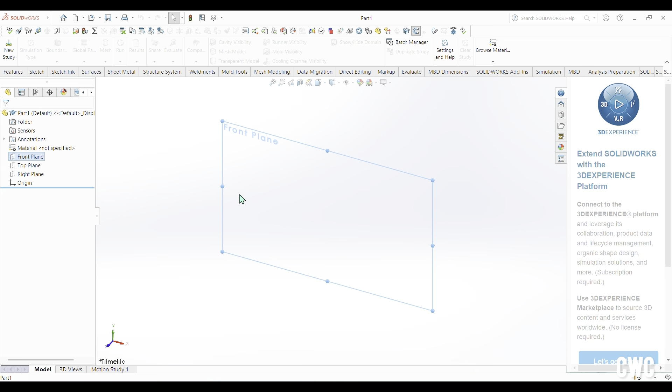When you're in, I'm going to go to the front plane, click Sketch, and click Line. Now I'm going to go off my origin, which is right there as you can see it. Go straight down, then Escape. I want to click it, make sure it is vertical, and then green check mark.

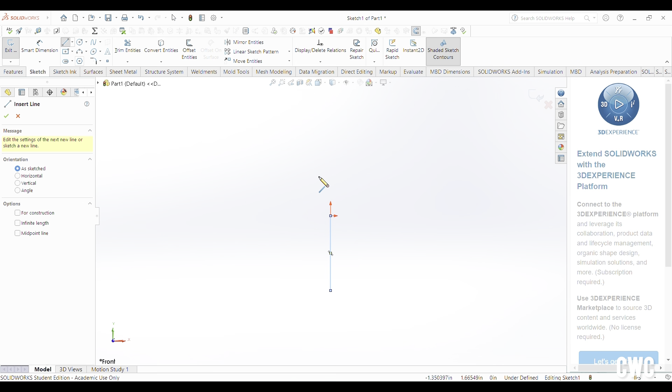Now I'm going to create another line from the origin as well. Go straight across, and then down, over, and don't worry, as I'm doing the sketch, you will see me put a dimension on there. So we are going to make this little square piece, and then just go up slightly, give or take.

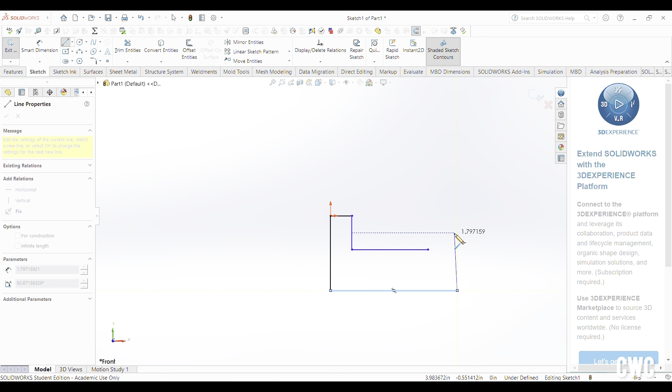Okay, so now as you can see it's crooked, so that's why you press vertical. Green check mark, and then now I'm going to dimension it.

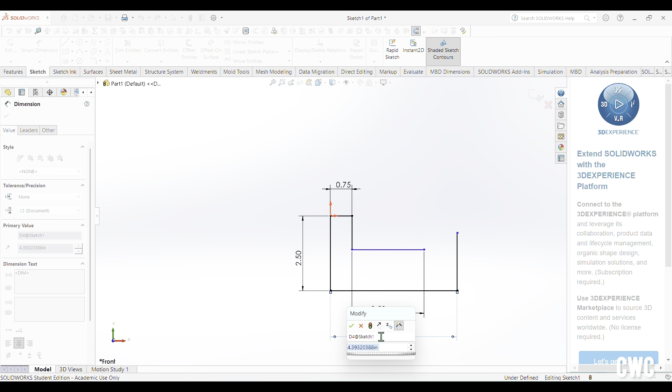2.5 inches, 0.75, and then come down. This would be 2.5, and this one would be, say, about 4.25, and then this one will be 2 inches, and then green check mark.

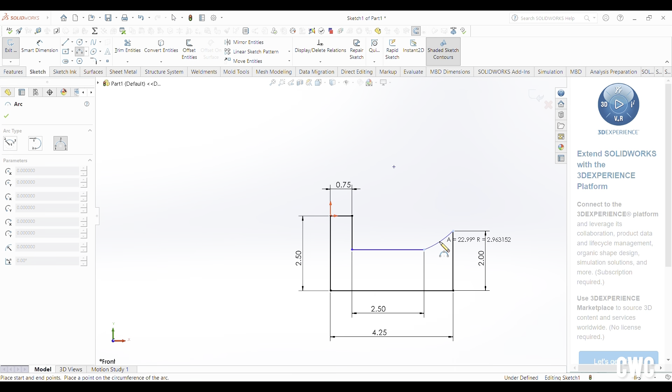Now I'm going to close my box, and I'm going to select the arc, 3-point arc. I'm going to go here, click here, and make it a little dip.

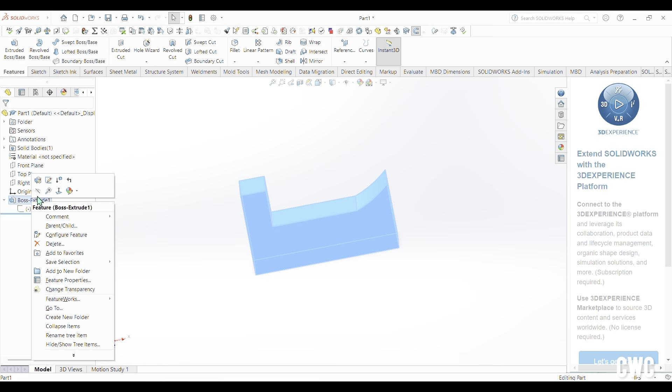Okay, now I'm going to click Features, Extruded Boss/Base, and I'm going to do a point. Actually, I want this slightly bigger. As you can see, it doesn't actually look like what I am going to cut out later, but I'm going to go back in it, not to the sketch but the boss, and I'm going to make this 150, and actually 2 inches. Yeah, so that looks a lot better.

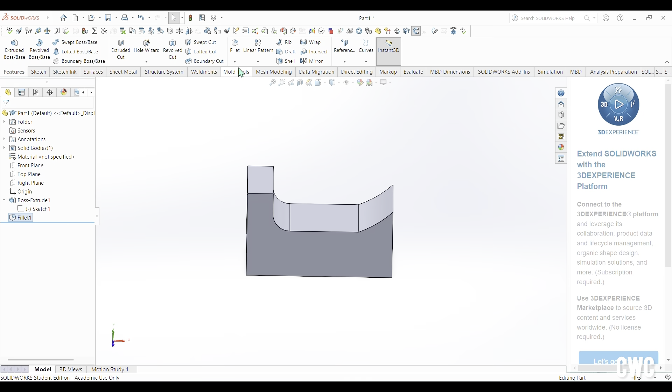It's starting to take shape now. All right, so I am going to fillet this corner, just 0.5, and then now I'm going to fillet this, but actually as you see it, I don't like that, so I'm going to go with a chamfer. Click this, and then it needs to be flat on the top. So what I'm going to do is change up the degrees actually to make it flat, as you can see there.

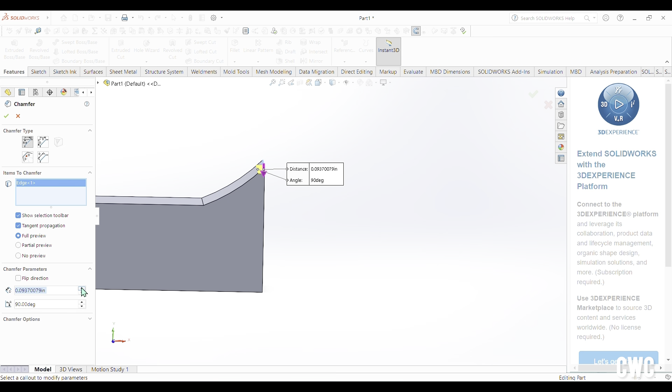And I'm going to make this 90 degrees. And as far as the distance, that's okay. We can leave it right there how it is. So green check mark, there you go.

So now you have your piece, and as you see in the piece, there is also a hole in there in the center. So...

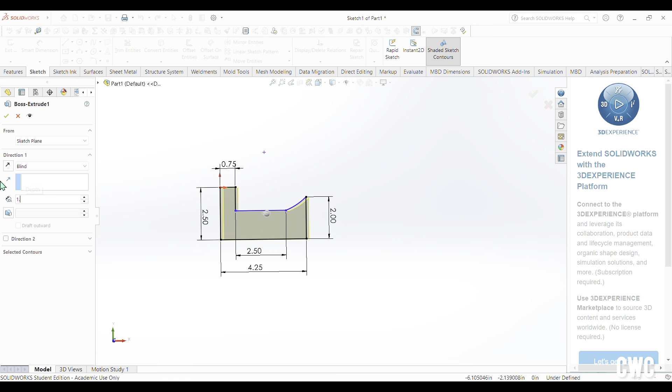I'm actually going to go back in here, readjust some sizes, but it's okay. You'll know what I mean when I say readjust the sizes, because your pieces matter, the sizing. Excuse me, sorry, I lost my train of thought.

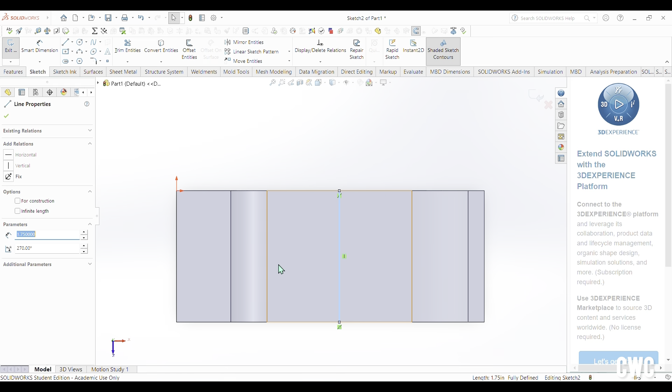All right, so what I'm doing now is I click the inside. This is for the hole, and I'm making a construction line. There you go, make sure these are all construction. If they're not, they'll show as an open-ended piece.

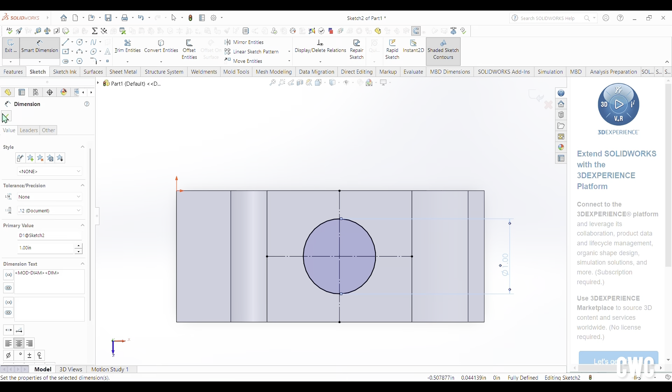And make your circle, this is going to be 1 inch. So there you go, green check mark, features, extruded cut, and we're going to go through all, green check mark, and there you have it, your piece. So nice and simple, easy to draw.

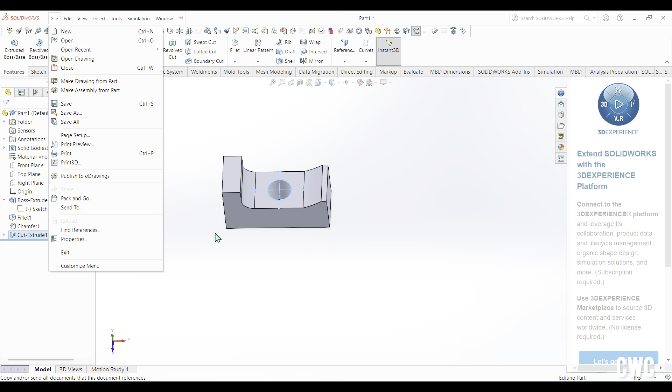These are the pieces that are going to clamp down the MUOS antenna, I believe, if I'm not mistaken.

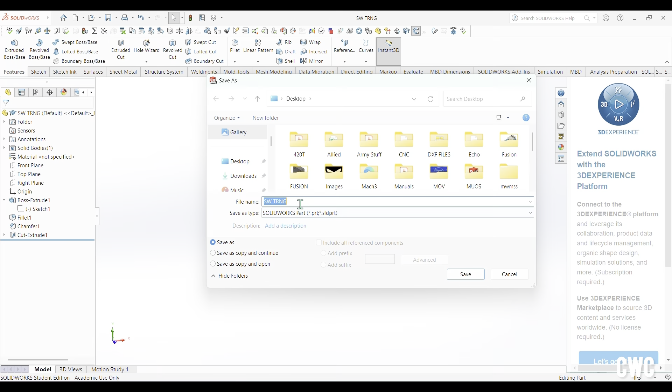But make sure you save your work. I saved this as Solidworks Training, SWTRNG, and I'm putting it on my desktop so I can find it. And then also you want to save it again as a step file, which is right here in the drop down, and put it on the desktop.

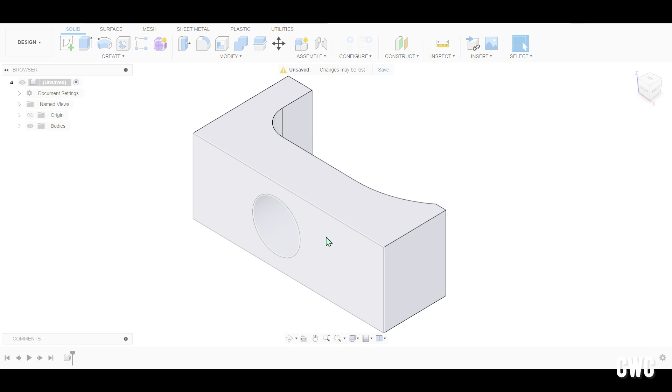This is for Fusion, so that way I can upload in Fusion. Once that's done, go ahead and open up Fusion, and you're gonna go in File, click Open, go open in my computer, and then you're gonna click the SolidWorks Training to Fusion, as you can see here. Populate it right up. This is what I just drew in SolidWorks, as you can see here.

Like I said, I made some minor tweaks, but for the most part, you can understand what I drew and how it translates into Fusion.

All right, so now I'm gonna click top, highlight all, click move, and then I'm gonna make copies of this. So create copy, and then once you click that, I'm just gonna move it up slightly with this arrow.

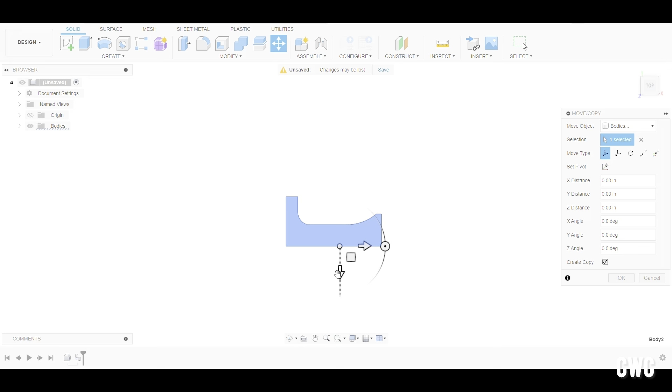Okay, I'm gonna do negative 2 point, I like 2.50 actually. That's a better bet. Don't want them too close because I gotta cut them out. And then once it looks good...

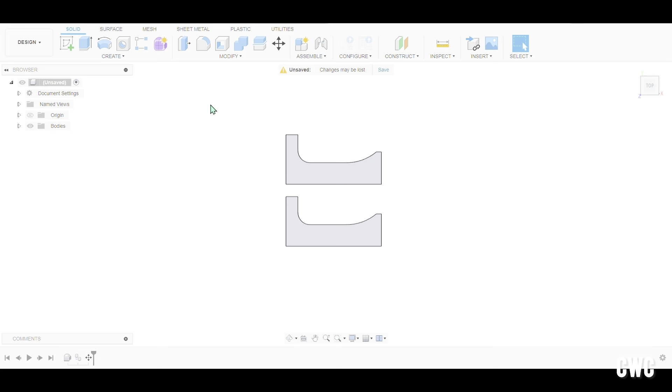Click OK, and then I'm gonna highlight all of them now. Right click, move copy, create copy, and then it should give me 2 more. And I'm literally just moving them directly on top of those other 2 because we're gonna be cutting out 4.

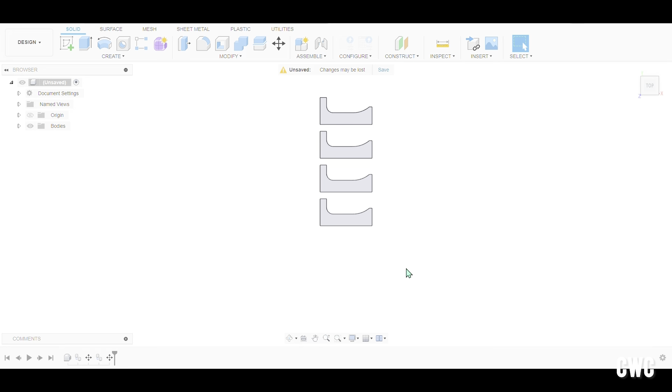Everything looks good, click OK, and then now you're still in the design phase, and to CAM this you are going to have to click where design is, drop down, manufacture, and now this is for the CAM portion.

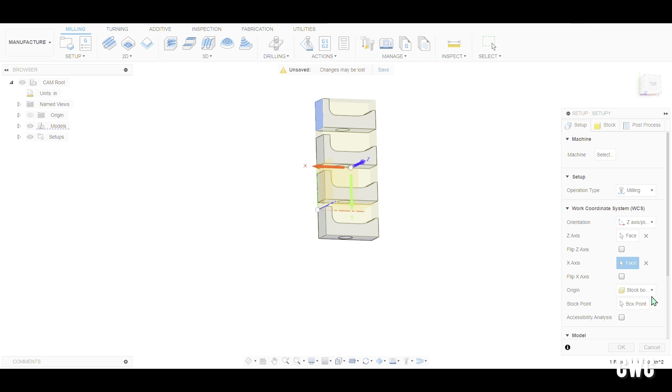You can click new setup, and you are going to click on the orientation Z, and then I click the face, and then for the X I click the side. And then stock box point, this is where you are going to set up your work coordinate system, WCS.

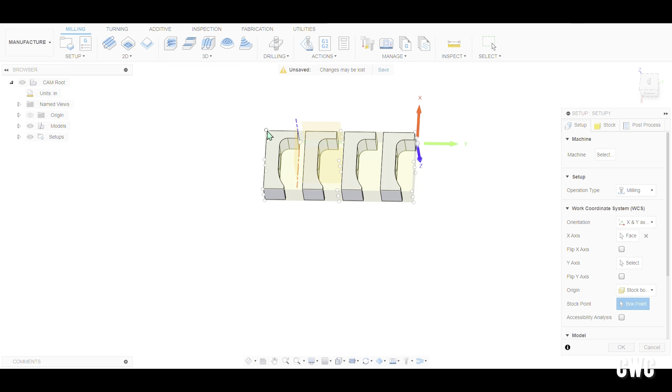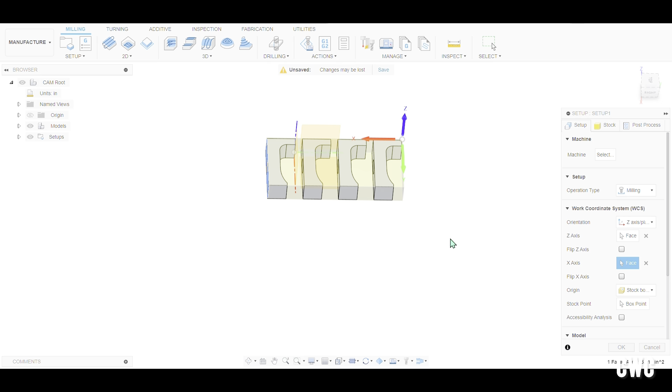I'm going to click this corner because I like the top left. I'm messing around with it, just trying to make it right. So as you see here, click the face of the X back here, then box point, click that corner. Now I'm good to go, and flip X-axis. You have your G54 in your top left. That's how I like it.

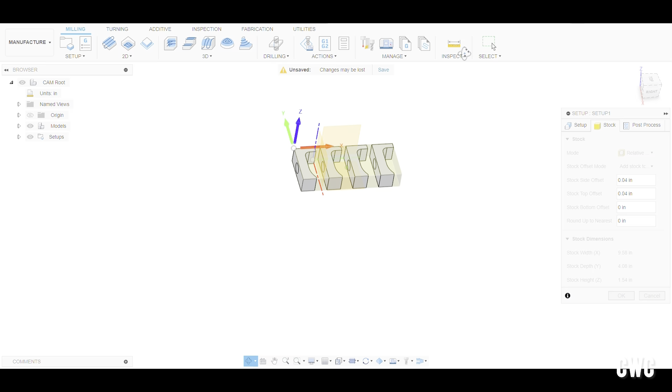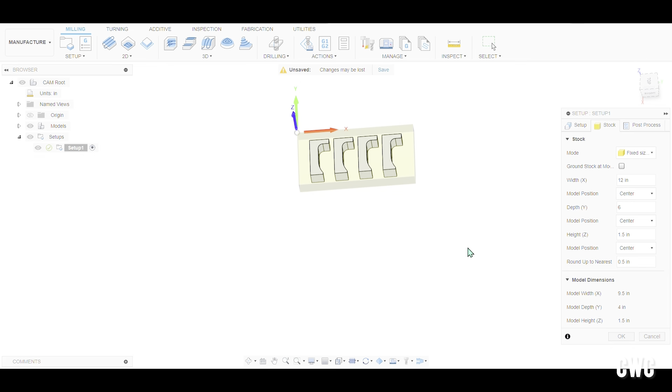Now I'm going to set up my stock so that it matches what I'm putting into the machine. I'm going to go to fixed size box, and on the X I'm going to go with 12. Back to stock, 12, and then the Y I'm going to make it, let's see, I guess 6 doesn't look too bad.

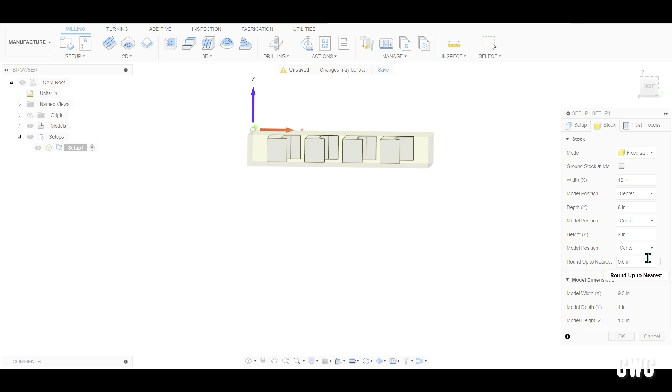Now for the position of the model, back in stock. So the model position is literally top of the Z, and I have it, the offset is 0. So your part is sitting right on the top, like it cuts from the top of the metal.

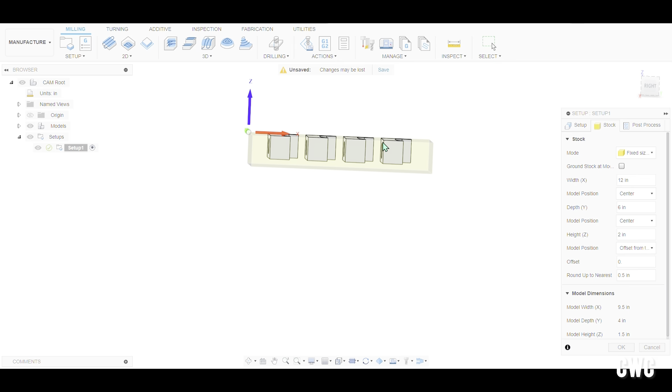And I'm going to change the, as I'm showing you, the height is the thickness of your part. So the thickness of my part is 2 inches, or my stock, excuse me. And then your X is your width and the Y is your length.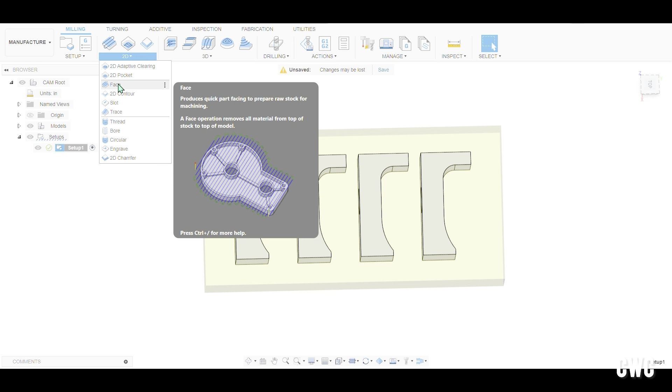And here are the different types of strategies that I plan on using for milling. So there's 2D adaptive clearing, 2D pocket, face, 2D contour, slot, trace, thread, bore, and etc. We're going to go with a 2D contour. Why? Because I've used this before. But before you can actually go with that, you're going to have to create a tool if you don't have a tool library.

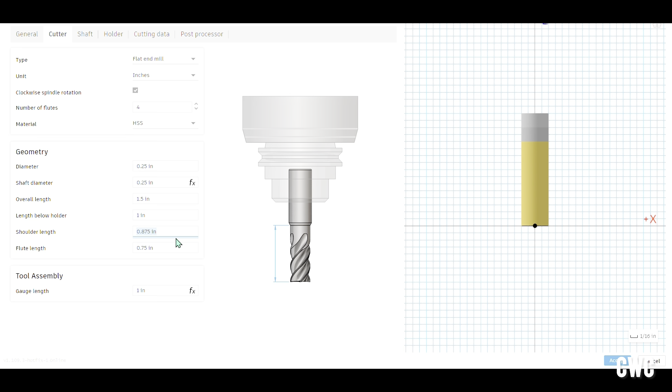So in the plus sign, I'm going to be using a 1/4 inch end mill. And if you see here, it's already built in. Rule of thumb is you want to measure out your cutter. Every cutter is different. You don't want to just go with the default program because maybe your cutter below the length can be longer. You don't want that. You want to tell the machine exactly how your cutter is in the Cat 40 holder.

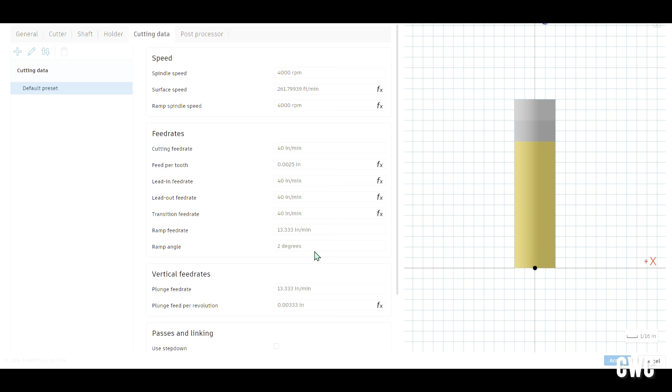So turning down the spindle speed to 4,000 because max RPM on a Haas CNC machine is 4,000 RPM. It's a TM1, so my surface speed, which Fusion calculated for me, was 261, and I like that. So this is going to be my tool, 1, the 1/4 inch end mill.

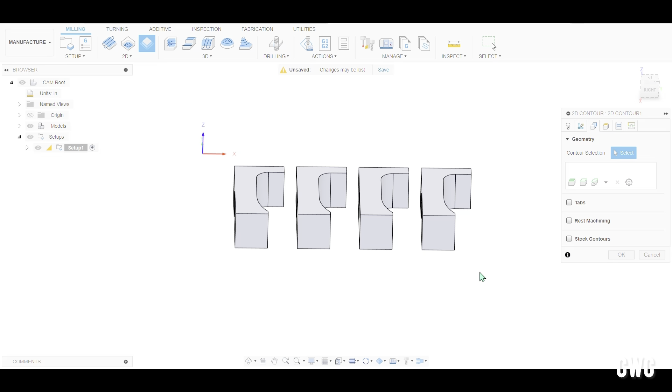Can't type today. Click accept, click select, and then from there you want to make sure you work from left to right as well. Never right to left, always left to right. So right here, I'm in my geometry, I'm clicking the bottom because that's where I'm cutting it out.

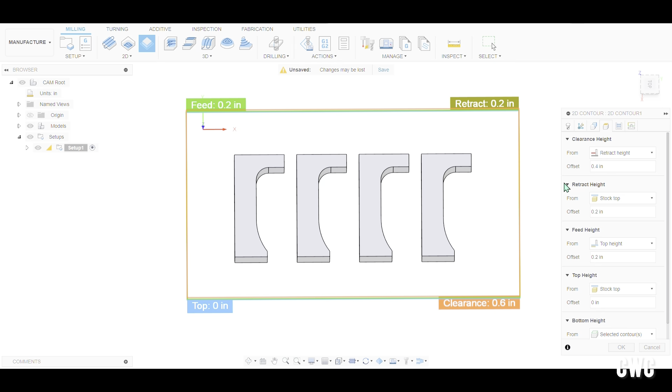And I want tabs. I want 0.15 tabs, not 0.25 — that's a little too much. So it automatically puts the tabs where you want them, or it automatically places tabs for you, but you can also place them how you want them.

So now we're in the heights tab. I don't need to mess with this because in my geometry I already told it that I want it cut at the lowest level. So now we are in the passes tab.

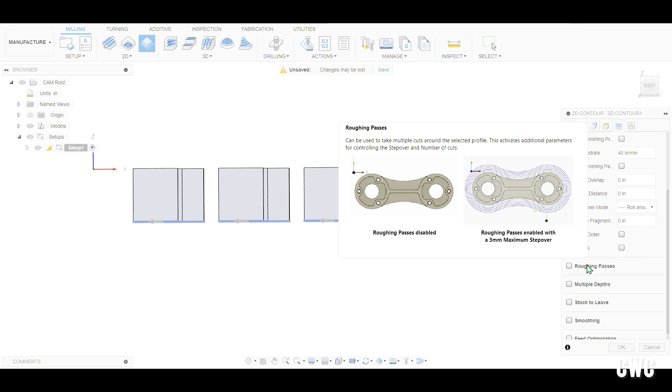This is where you're going to tell the machine how you want to cut it out. So I could do a roughing pass and the rest, but I'm not going to go with the roughing pass. Actually, I'm going to go with multiple depths. I'm just going to take out the roughing pass, as you'll see here.

And so it wants to go 0.5. I'm just going to go with a 0.125. Reason being, I didn't want to go more than 50% of the cutter. Like I could have done a 0.25, and that's the whole cutter. So I just do a conservative approach, just to be on the safe side.

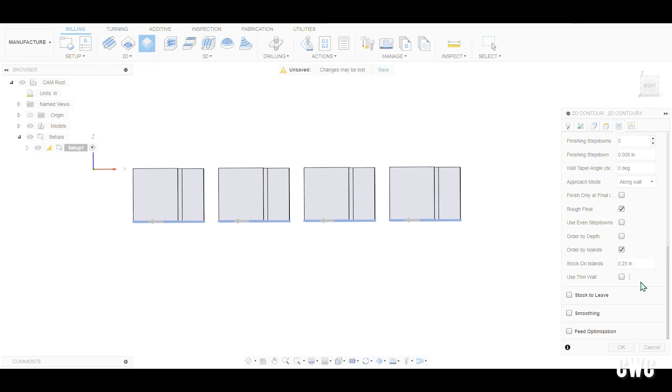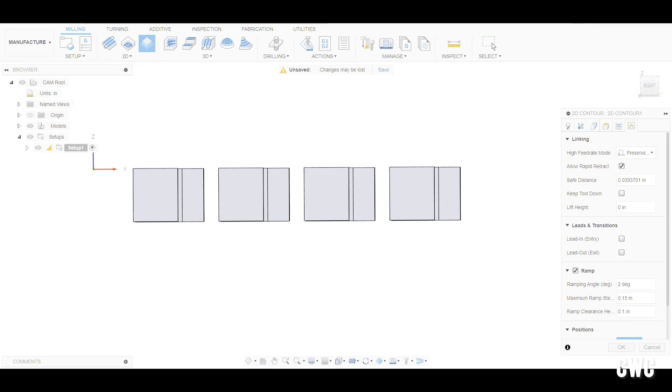So if everything looks good, go ahead and go to the next tab, take out lead-ins and lead-outs. I was just going with this because I don't want to crash the machine. It might not crash, but just for me, this is what I'm selecting. I added a ramp in there, and if everything looks good, go ahead, click OK, and watch your part.

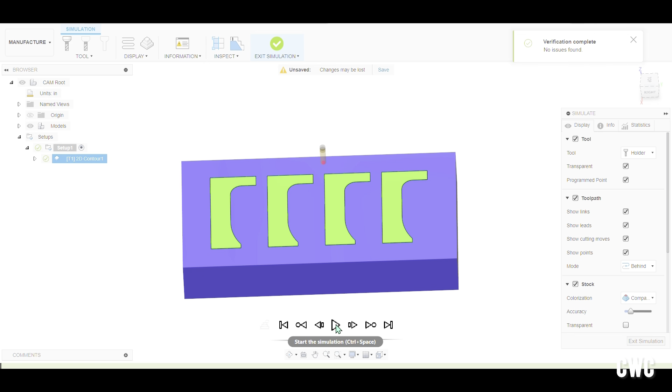And you're going to go up to the setup, or you can click the 2D contour, right click, and go with simulate right there. Watch it. If everything looks good, which it should, you'll be good to go.

This took a total of 1 hour and some change. Now that you have your pieces cut, you need to get them out because they're still inside the actual material.

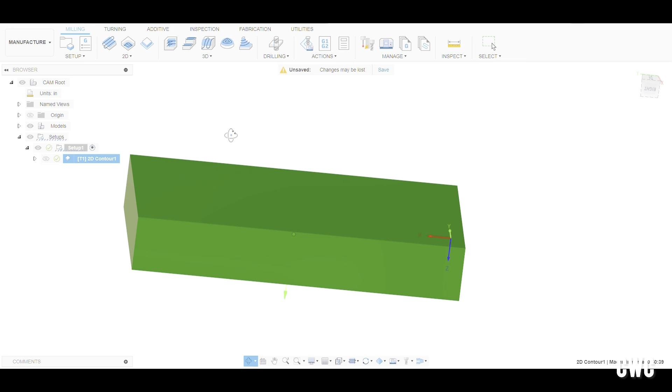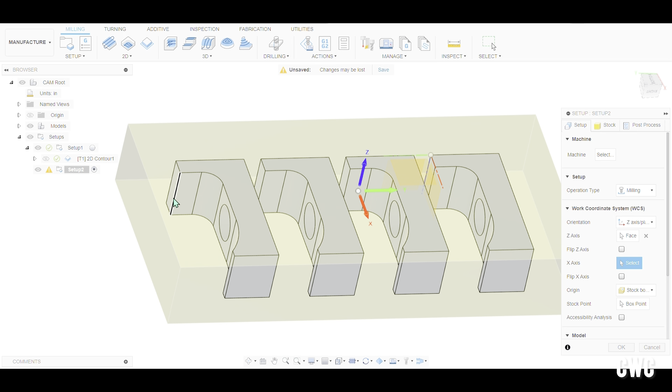So you're going to flip your part over just like this, and then click new setup. On new setup, click the Z at the top, and then on the X, click right here on the side—not the edge, but right here on the side. Then click the box point, click the corner, and just flip the axis.

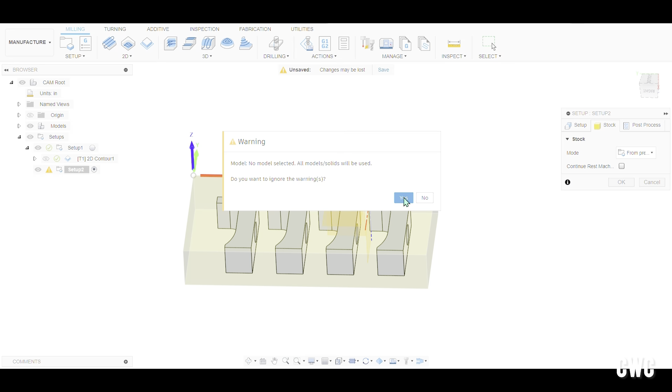Now you have your G54. Stock you don't need to worry about because it's just from the preceding setup, so click OK. There you go. So we are going to face this side now to get out those pieces.

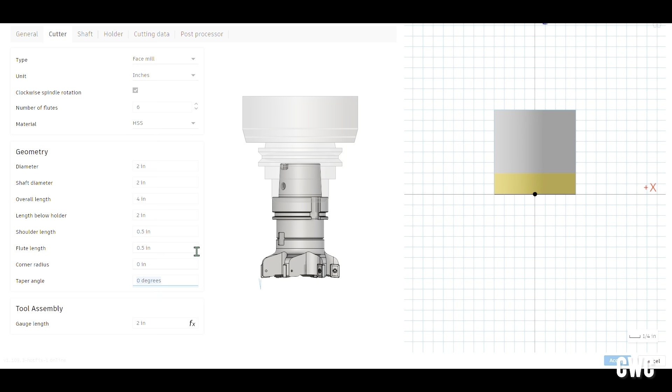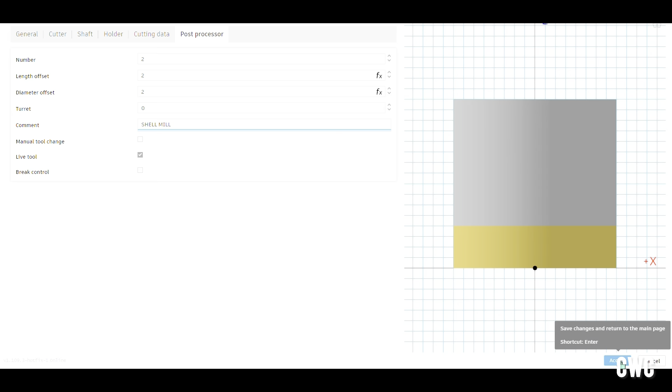For cutting data, the machine is only rated for 4,000 RPMs, but for the shell mill I'm just going to do 3,500 RPMs. It calculates the surface speed for me. I'm okay with 40 inches per minute on the feed rate, and I named this shell mill tool number 2. Click accept and select. Now you have your tool.

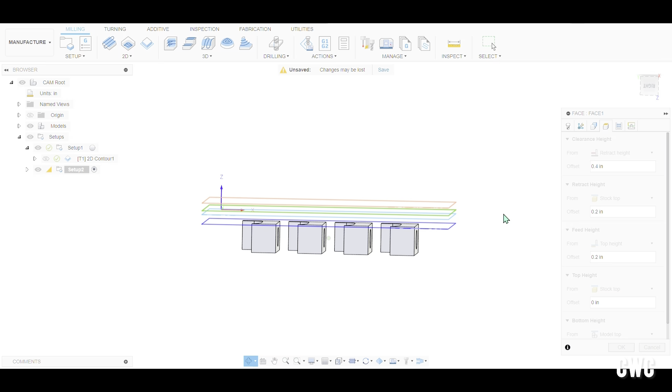Remember, work left to right, and I'm going to cut out the face. That's all I want, is the top—I don't want to go any lower because then I'll cut into my actual part. So you don't need to mess with the heights tab, that's fine here. Those are face contours, and then of course I want to go multiple depths.

Then the maximum step down, I will go and change that. Take the lead in and lead out. Click OK. Let's watch it.

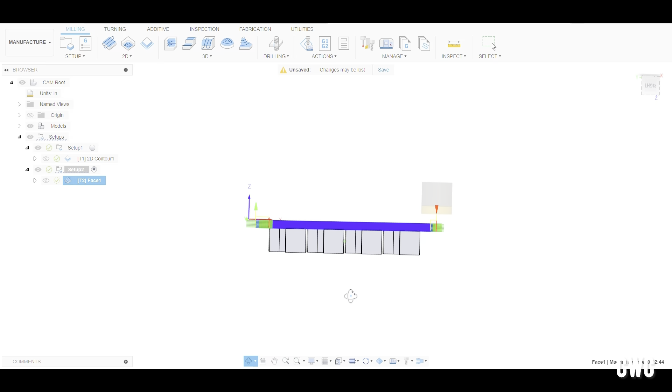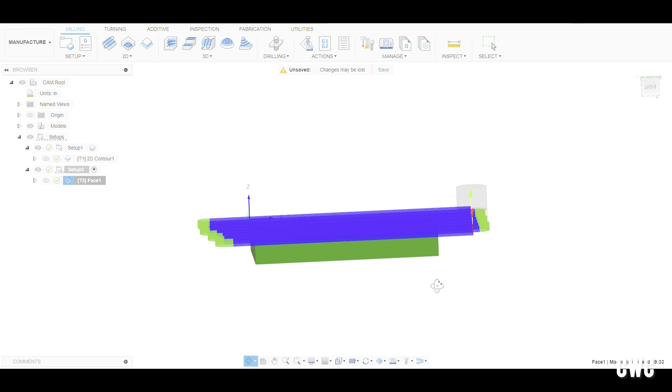So I will go back in there and change the step down. Right click, edit, and then right here for the multiple depths, I'm going to adjust the stock offset to go 3, because as you notice it was just cutting out the center. So now it's cutting the whole piece, that way I'm not just cutting the center of it—I want to make sure I'm trimming everything.

As you see here, you're trimming everything. And that's going to take 40 minutes, which is not too bad.

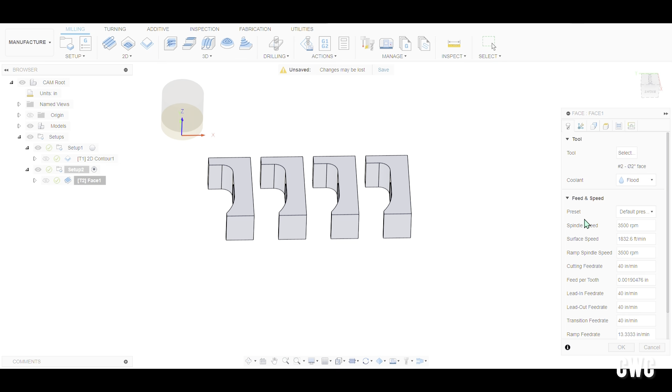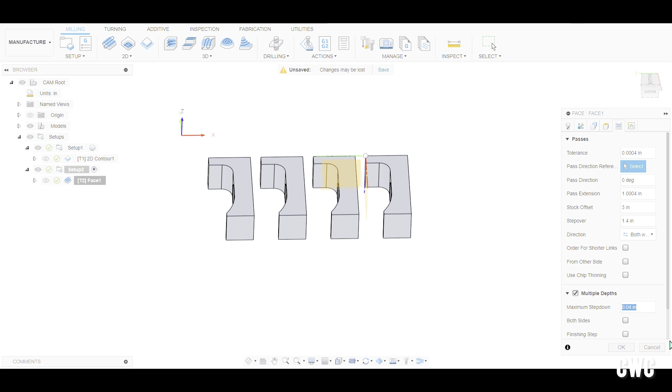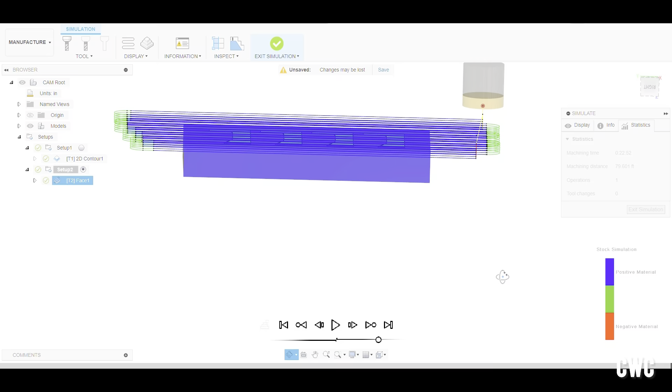Back in there, and then I'm going to change this to the maximum step down. I'm just thinking in my head now, what should I change it to. So I just went with 0.09, and I will show you the time difference. I went from 40 minutes to 22 minutes. That's not bad—I can actually probably go a little bit more on the step down, but as far as that, I went from 40 minutes to 22 minutes.

Now that everything looks good, you're going to post-process this. This is how you're going to take your G code and put it into your machine via a USB flash drive. So I'm going to name this 01001. If you're using Haas, it has to be 01001, etc.

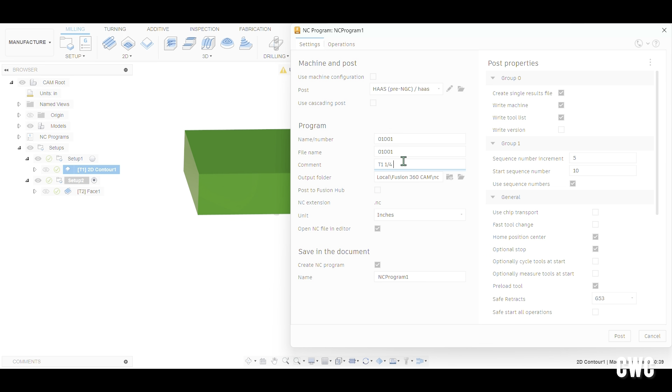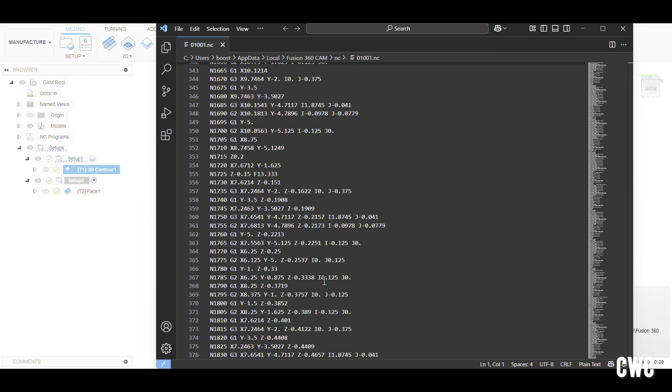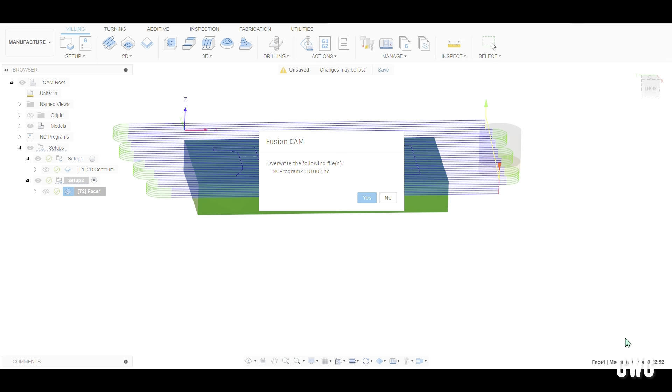For setup 1, I'm not using a paid version, I'm using a student version, so I named it what I wanted to name it, and it's going to open up a G-code reader file for me. I'm going to do the next one and setup 2 post-process again. This one will be 01002, and in the comments I named it also, so that way you can see it in your machine. Click post, yes.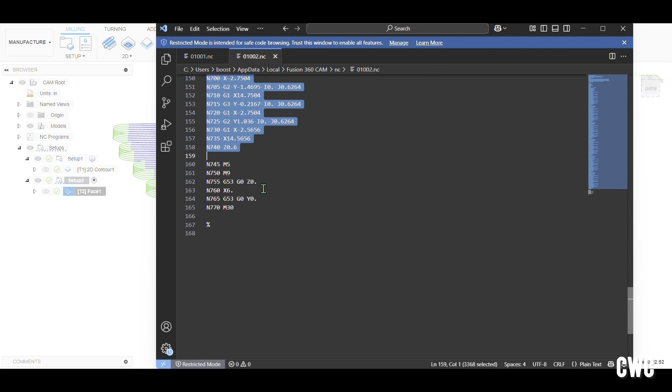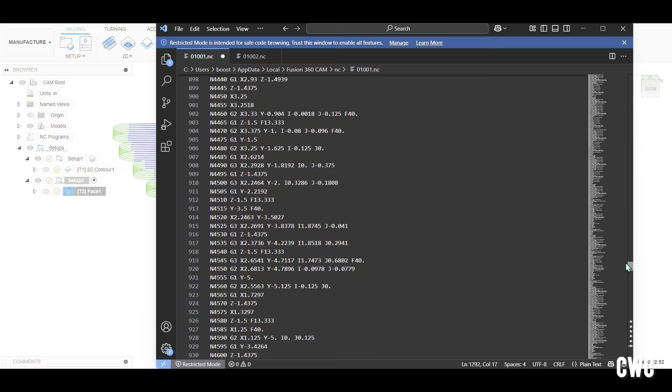To put it all together, because I don't have the paid version, I'm just going to highlight everything—not to the ending of the G code, but as you see right here, go all the way down. Make some space right there, and Control V. Just scroll back up to make sure you added the correct thing, and if everything looks good, you're going to save this.

I'm just going to name it today's date, and I will send this to my flash drive to upload onto the Haas CNC machine. So I gave it an extra name, SolidWorks Training, today's date, and click save.

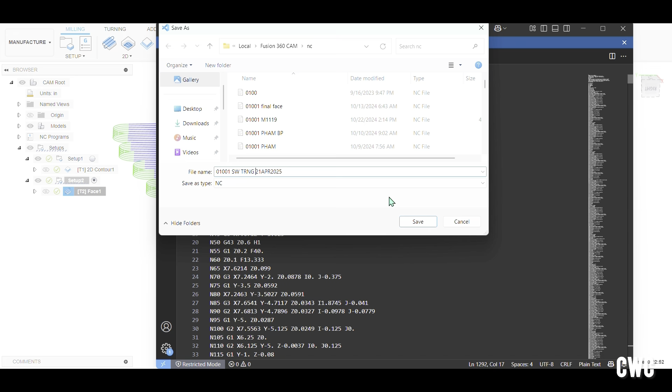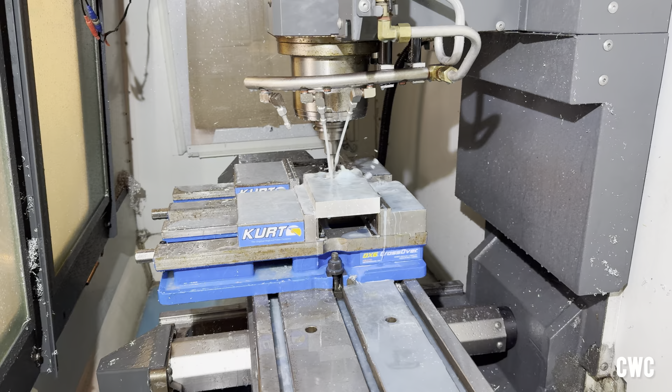Minimize. Make sure your G54 is set on your machine to include your tools on top of the part, and make sure your feeds are 50%, 25% rapids, and watch distance to go, and you should be good to go. This is what it should look like, your job that you had just cammed, because of course you designed it in SolidWorks—real nice finish.

We're now going to place it back in the vise, flip it over, get G54, cut out the shell mill, and you'll see the pieces—real nice. Get off the bed.

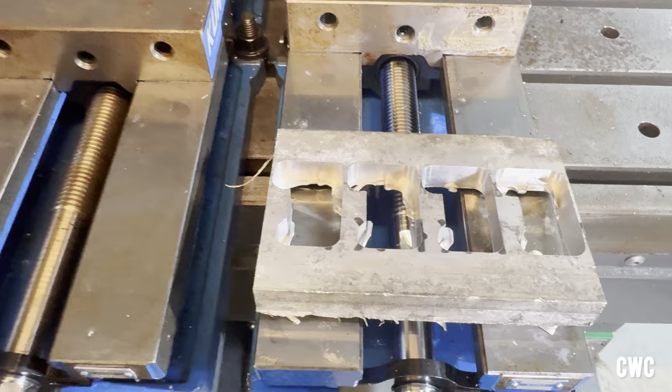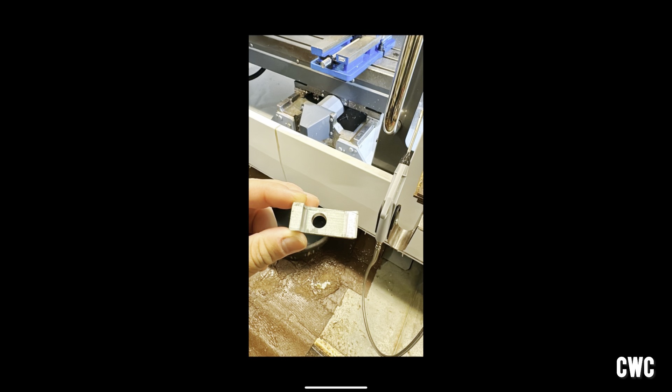Alright, this is how it looks, all done, and these are the pieces. Of course, you got to drill out the holes. But here are the pieces finished—the holes were drilled out, as you can see here. They're not bad looking, came out pretty good.

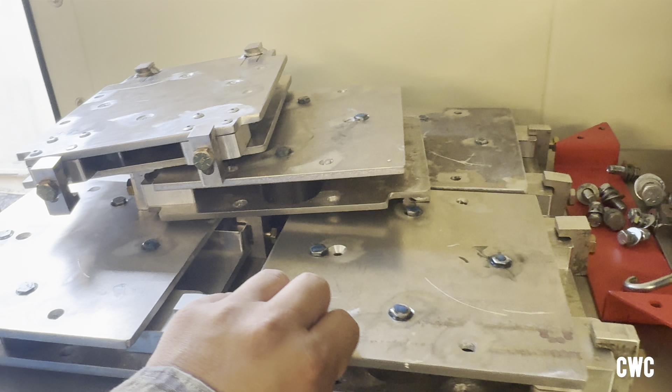Here it is, you can see with the tabs. Yeah, not too bad—for the most part, I mean, look at it.